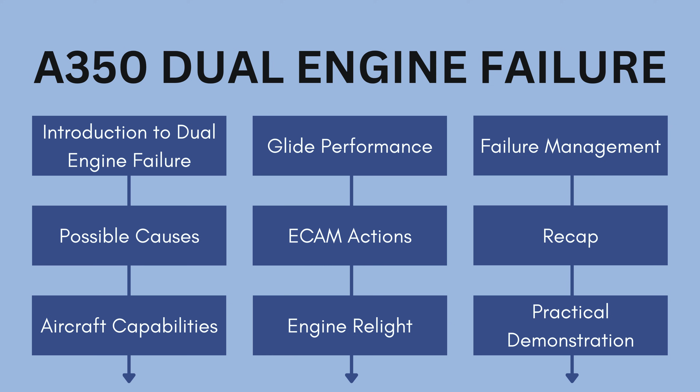An engine failure is a partial or complete loss of thrust, which can prevent the aircraft from maintaining level flight. While a single engine failure is a serious event, the complete loss of both engines presents a far more critical challenge requiring immediate and precise crew coordination. In such cases, a dual-engine failure scenario will most likely be detected by the flight warning computer, which will generate the all engines failure alert. This warning signals the start of a time-critical sequence, where altitude and energy become your most valuable assets.

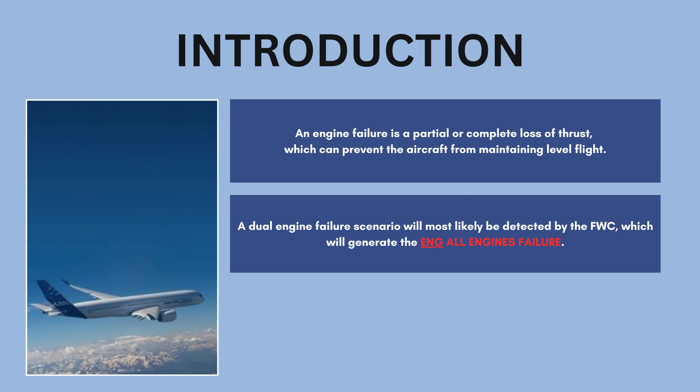The ECAM procedure becomes your primary reference. It first helps you protect the flight by maximizing glide performance, allowing the aircraft to remain airborne for as long as possible while maintaining optimal control. Once stabilized, the ECAM then guides you through a structured engine restart attempt, offering the opportunity to recover thrust and regain control of the situation.

If the relight attempt is unsuccessful, the procedure then transitions to preparing for the final phase of the emergency, whether that be a ditching or a forced landing, ensuring the crew is supported with clear, actionable guidance throughout. This lesson will guide you through each of these phases, focusing on both the technical procedures and the operational mindset required to manage a dual-engine failure effectively.

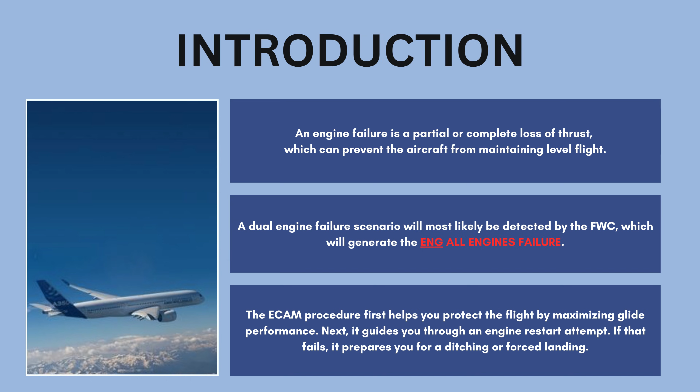While dual-engine failures are extremely rare, understanding their potential causes is essential, as this knowledge can directly influence how we respond to such an event. Let's have a deeper look at these causes.

Environmental factors are among the more well-documented contributors. Volcanic ash ingestion, for example, can severely damage internal engine components, leading to flameout. Similarly, encounters with severe ice or hail can result in engine stall or failure due to disrupted airflow or mechanical damage. Mechanical failures, though uncommon, remain a possibility. These can stem from internal component failure, sensor malfunctions, or system degradation over time, often with little to no prior indication.

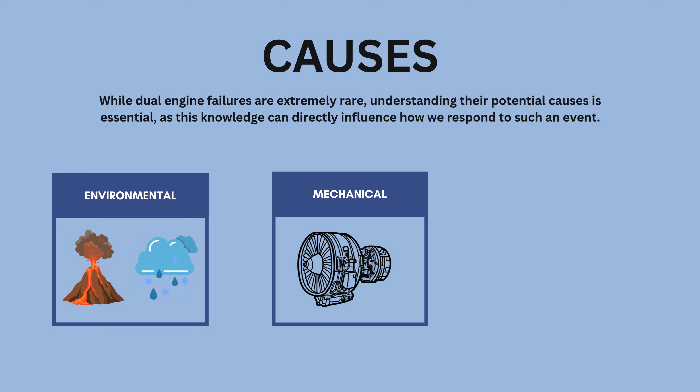Fuel-related issues also present a serious risk. A dual-engine failure may result from a major fuel leak, restricting supply to both engines, or from fuel contamination or clogging, which can disrupt combustion and cause both engines to shut down. Each of these scenarios demands a different approach, and identifying the likely cause early can be key to choosing the most effective response.

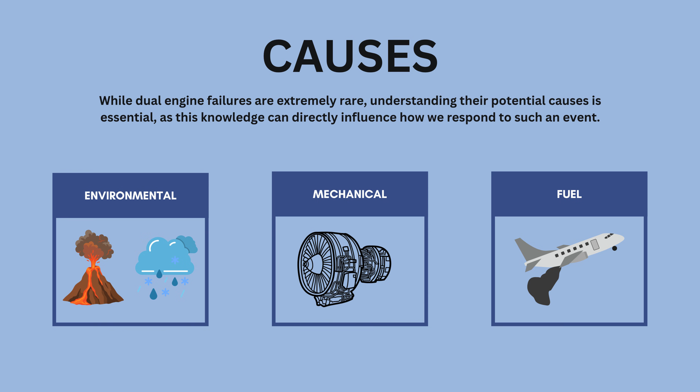Let's examine how the aircraft performs and what capabilities remain available in the event of a complete loss of thrust. Following a dual engine failure, the aircraft will generate the all engines failure ECAM. This gives the crew a step-by-step guide: protect the flight, attempt engine relight, and how to proceed if relight fails.

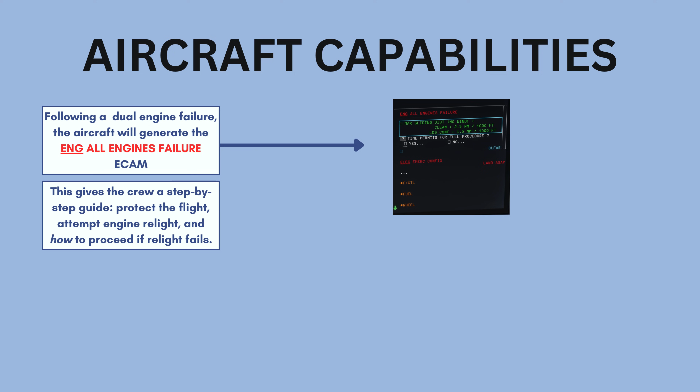Autopilot is available and should be used to significantly reduce workload. The ECAM will provide crew with a gliding distance, but a general rule of thumb is 2.5 nautical miles per 1,000 feet when in clean configuration, and 1.5 nautical miles per 1,000 feet when flaps or slats are extended. These figures only apply when in no wind conditions, so bear that in mind.

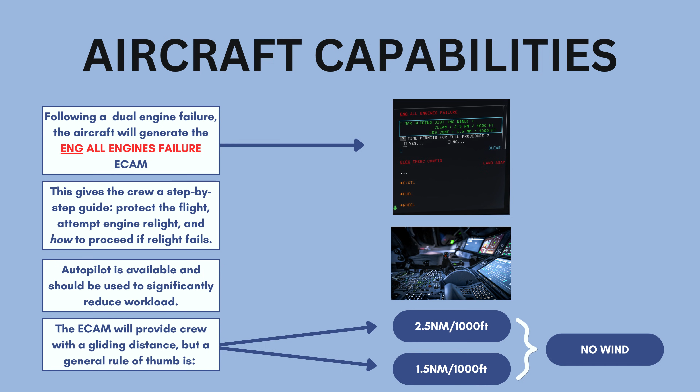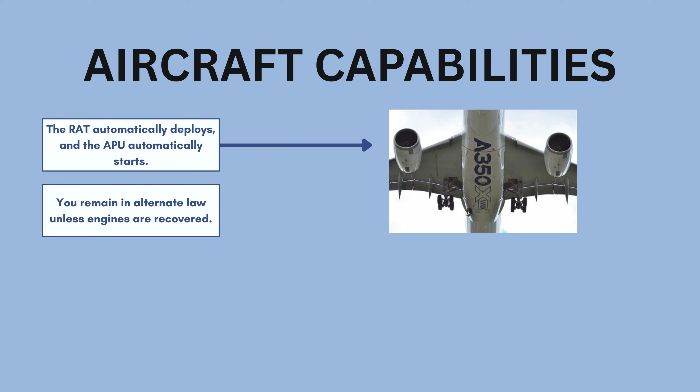The RAM air turbine, or the RAT, automatically deploys, and unlike most other Airbus aircraft, the APU automatically starts, reducing pilot workload. You remain in alternate law unless engines are recovered. However, automation is available. Some flight controls are lost, but others are maintained via the EHAs and EBHAs.

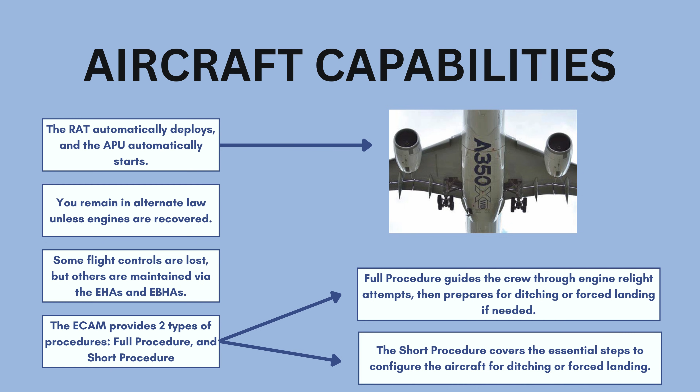And then the ECAM provides two types of procedures: full procedure and short procedure. The full procedure guides the crew through engine relight attempts, then prepares for ditching or forced landing if needed, whilst the short procedure covers the essential steps to configure the aircraft for ditching or forced landing.

Now that we understand the aircraft's capabilities and the ECAM procedure for this scenario, let's take a closer look at how we manage the failure as a crew.

As always, we follow the Airbus golden rules: aviate, navigate, and communicate. Under aviate, the priority is to stabilize the aircraft. Autopilot 1 becomes available shortly after the ram air turbine deploys, and autopilot 2 becomes available once the APU has started.

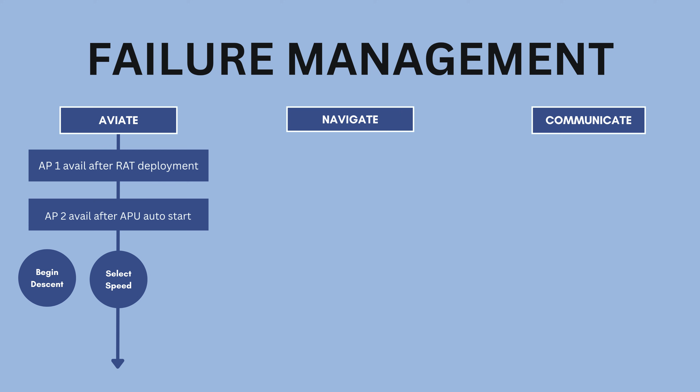With the autopilot engaged, the pilot flying should begin an immediate descent, select an appropriate speed for engine relight, and clearly announce the FMA. The recommended relight speed is usually shown on the ECAM, but always consider whether that speed is safe for your current altitude. In some cases, starting with green speed may be more suitable.

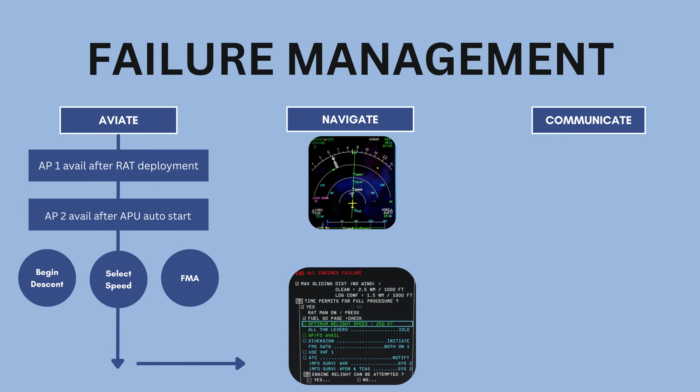Navigate is straightforward. If an airport is within range, turn towards it. If not, begin considering options for a forced landing or ditching based on your position and terrain. Under communicate, inform the cabin crew of the situation and make a mayday call to ATC as soon as possible. By following these steps, we ensure the situation is managed in a structured and effective way.

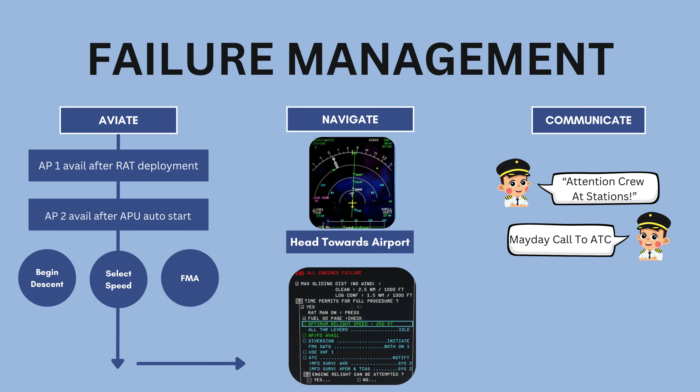If the engine relight attempts are unsuccessful, your ability to manage the failure becomes critical. This is where structured decision-making is essential. Let's take a closer look at how to apply the TDODAR model in this situation.

T for Time. The amount of time available is directly influenced by your current altitude. However, regardless of altitude, time remains critical, making every minute essential for effective decision-making.

D for Diagnosis. You have a dual engine failure. Relight attempts have been unsuccessful so far. You have a gliding distance of 2.5 miles per 1,000 feet. Consider what is the status of the aircraft.

O for Options. Is there an airport near you? Will you be ditching or will it be a forced landing?

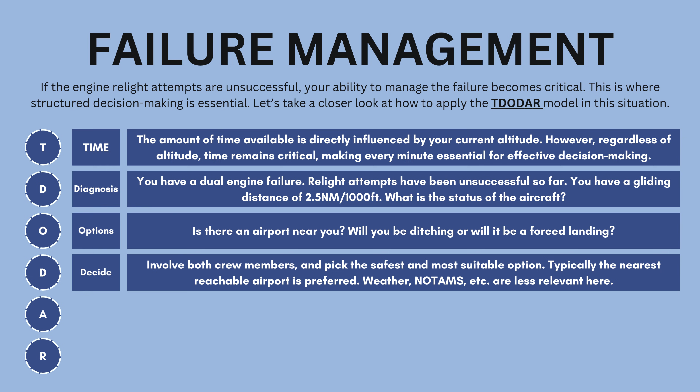D for Decide. Involve both crew members and pick the safest and most suitable option. Typically, the nearest reachable airport is preferred. Weather, NOTAMs, etc. are less relevant here.

A for Assign. One crew member should be focused on flying the aircraft, whilst the other should be continuously attempting to relight the engine, manage checklists, and also liaise with ATC, crew and passengers.

And R for Review. Your situation should be constantly reviewed. How is your altitude compared to your distance to go? Can you still make your plan?

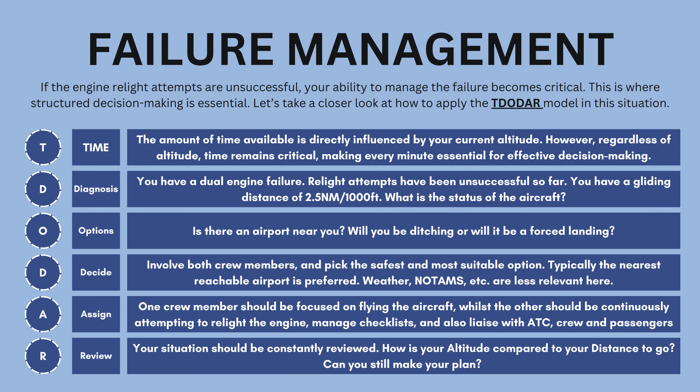Relighting the engine remains the biggest priority for the crew. Airbus have carefully developed their engine relight procedure, following the failure of all engines. There are two types of engine relight on the A350.

Above flight level 200, the crew will attempt a windmill relight, whilst below flight level 200, the crew will attempt a starter-assisted relight. For a windmill relight, the first thing the crew must do is maintain the optimum relight speed.

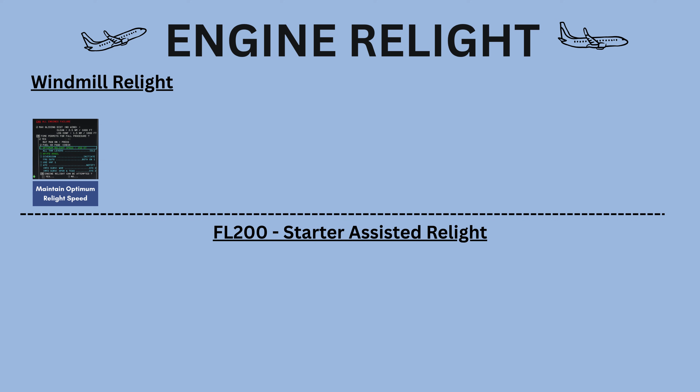As we mentioned before, this can be found on the ECAM procedure. The optimum relight speed ensures enough airflow for the engines to reach the rotation speed needed to compress air for a successful relight. Next, move the thrust levers to idle.

If they are not at idle, chances of engine stall or unsuccessful relight increase. Set the engine mode selector to ignition start to activate the combustion chamber igniters. Then, switch both engine masters to off.

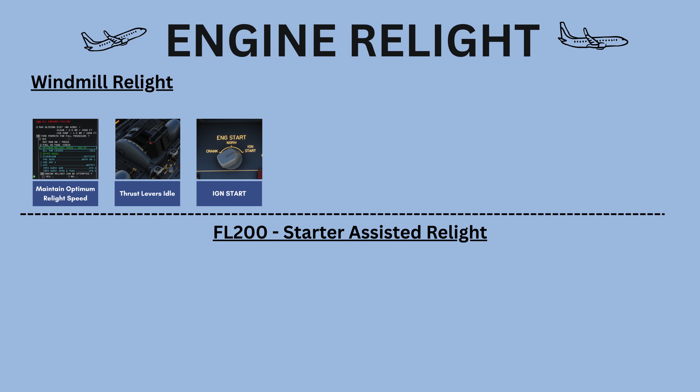This ventilates the combustion chamber to remove any residual fuel. Then switch both engine masters on at the same time. Monitor these parameters for at least 30 seconds.

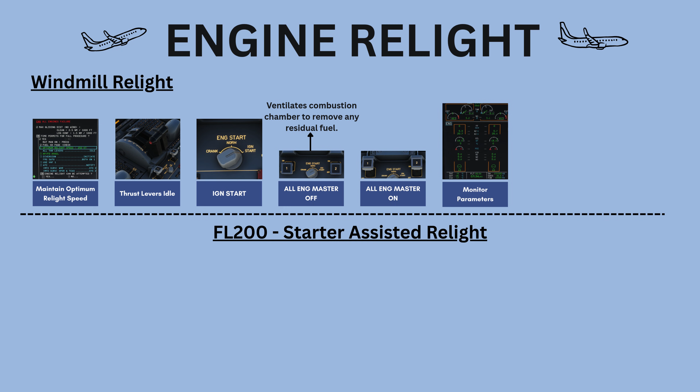Note that a successful relight can take up to 2 minutes. If no sign of a relight appears, then the process must be repeated. Switch both masters off for 30 seconds to ventilate the engines before setting the engine masters on again.

If there is still no relight, below flight level 200, the ECAM will guide you to perform a starter-assisted relight. The APU would have already started following this failure. This procedure goes as follows.

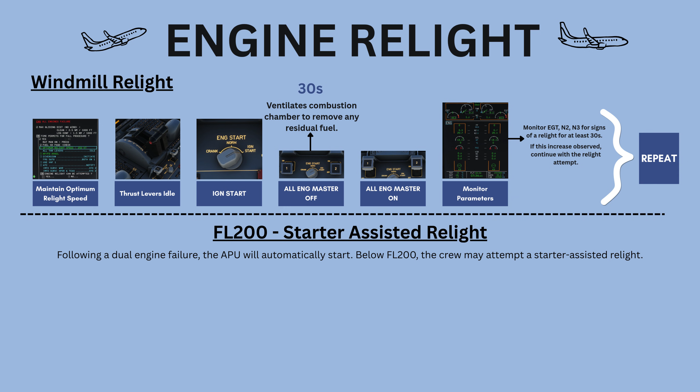All engine masters should be switched off again for 30 seconds. This ventilates the combustion chamber to remove any residual fuel. Reduce the speed to green dot as you no longer require speed for the windmill relight.

APU bleed is then switched on. By the time you have reduced speed and set the bleed on, you have had those 30 seconds for engine ventilation. Now, switch only one engine master on, as the APU bleed can only provide sufficient bleed pressure to relight one engine at a time.

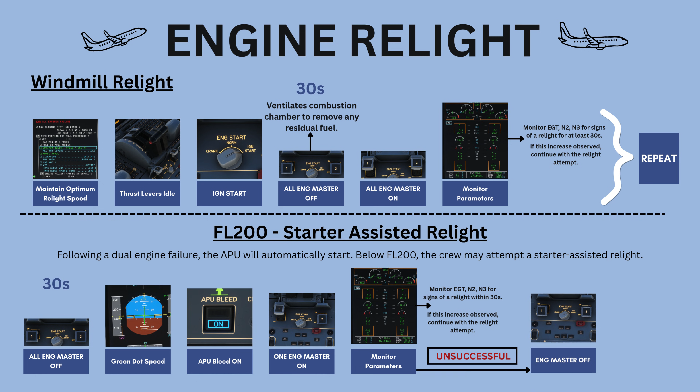Monitor engine parameters, looking for the same things you did in previous relight attempts. If the relight is unsuccessful, then the engine master should be switched off. Then repeat the start process with the other engine.

If you are unable to relight the engines, regardless of whether you are able to land on a runway or not, it is considered that you are doing a forced landing, that's if you are not ditching. Let's look at this procedure in more detail.

The landing gear should be extended to absorb some of the impact. Flaps 1 is recommended for a forced landing. Flaps 2 can be selected if more drag is required. Do not retract the flaps near the ground.

Keeping a minimum RAT speed of 140 to 150 knots, depending on your configuration, keeps the aircraft powered until landing. Crew must be alerted with the brace PA, which will initiate their own set of procedures. Increase your flare height and then shut down engines after landing. Consider initiating an evacuation.

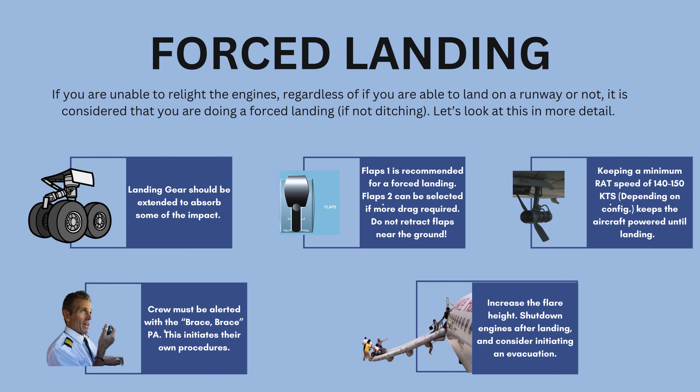Before we begin our practical demonstration, let's have a recap.

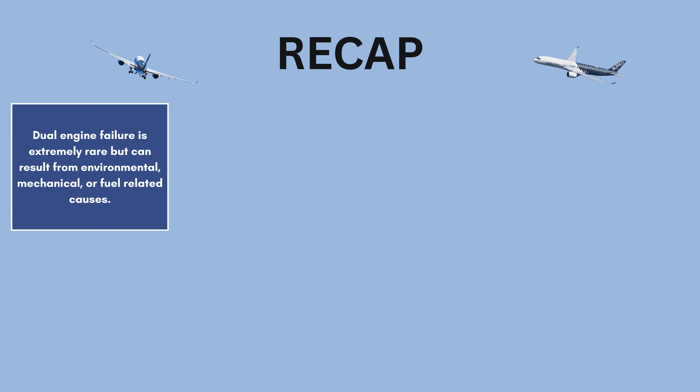Dual engine failure is extremely rare but can result from environmental, mechanical, or fuel-related causes. The A350 supports dual engine failures with autopilot and structured ECAM guidance. Crew should always aviate, navigate, communicate first. The main priorities are relighting an engine and identifying a suitable landing site.

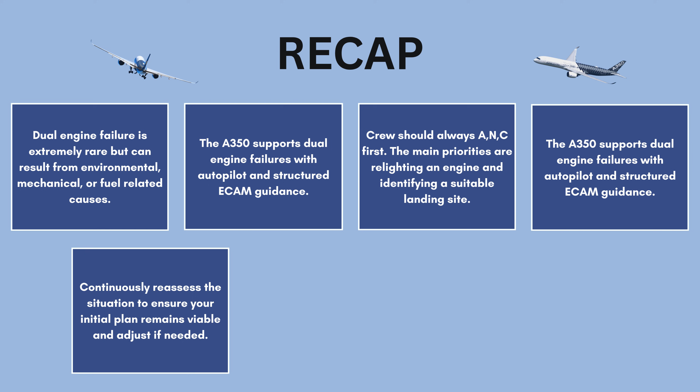The A350 supports dual engine failures with autopilot and structured ECAM guidance. Continuously reassess the situation to ensure your initial plan remains viable and adjust if needed. The two relight procedures are a windmill relight and a starter-assisted relight. After an unsuccessful relight, switch off the engine for at least 30 seconds to allow sufficient ventilation.

Master warning. All engines failure. Checked. I have control. Re-engaging autopilot. AP1. Checked. Thrust idle, open descent, flight level 100 blue. Speed selected. Checked.

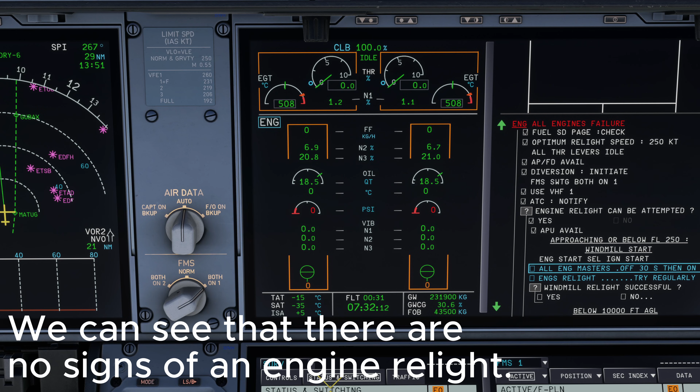Okay, in the meantime, let's begin looking at our options. Airbus 123, request a weather report for Cologne and Düsseldorf. Okay, with that information, they have similar weather. Cologne has a longer runway, and we can make it even if we don't relight the engines. Are you happy we commit there? I agree. Let's divert to Cologne.

No sign of engine relight. Engine masters off. Let's begin preparing the diversion to Cologne. Engine masters on.